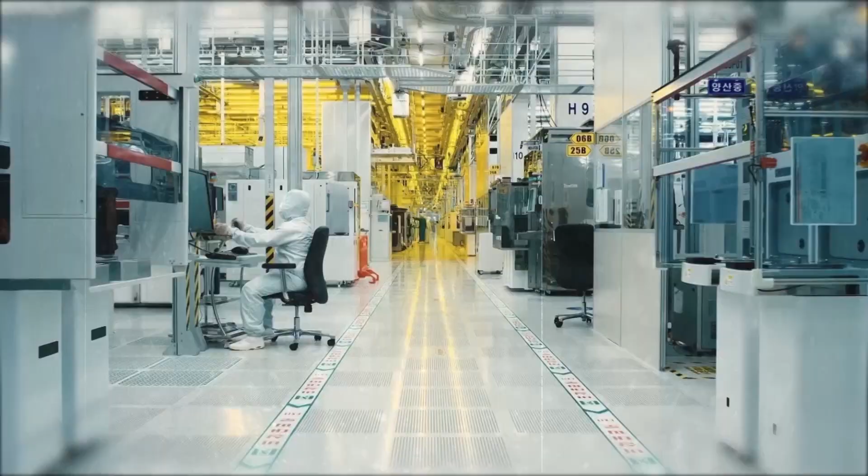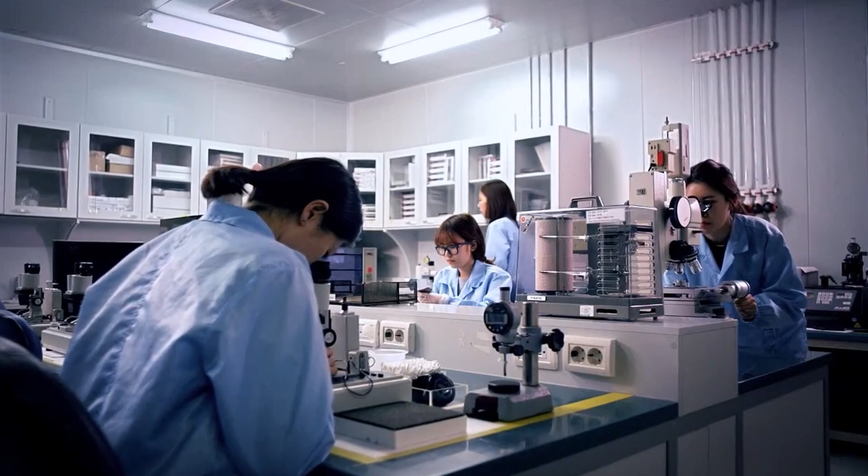Amidst the world's rapidly accelerating changes and competition, what kind of future are you preparing for? We are charting a path to the future through science and technology exchanges, bolstered by international cooperation. In this era, where scientific and technological competitiveness is directly linked to a nation's diplomacy and security, the power to overcome such challenges lies in international cooperation that fosters synergy through collective efforts, and from talents who will shape the forthcoming era. The scholars of the world are gathering in Korea.

A platform that facilitates exchanges between Korean and international scholars, as well as between seasoned and emerging researchers, is taking shape. BrainLink X Lab Day, organized by the Korean Federation of Science and Technology Societies, aims to be a global hub of talent. By consistently enhancing and expanding the global talent network, we're laying the groundwork for a brighter future.

By inviting global scholars, X Lab Day provides an opportunity for young Korean researchers to glean insights from the vast knowledge and experience of both Korean and international scholars, as well as to engage in collaborative research.

In 2022, the inaugural X Lab Day saw a total of 14 meetings across various technical fields. Altogether, 449 individuals participated, comprising 70 from overseas and 379 from Korea, all aiming to build a stronger network in Korea and abroad.

This year, for our 2023 X Lab Day, we have the honor of having Shing-Tung Yau, professor at Tsinghua University and a Fields Medal winner; Philip Kim, a globally renowned professor at Harvard University known for his research in graphene; Yoon Sung Hwang, professor at Stanford University and Hoam Award winner; and Humboldt Research Award winner Zhigang Suo, professor at Harvard University, leading discourses in their respective fields.

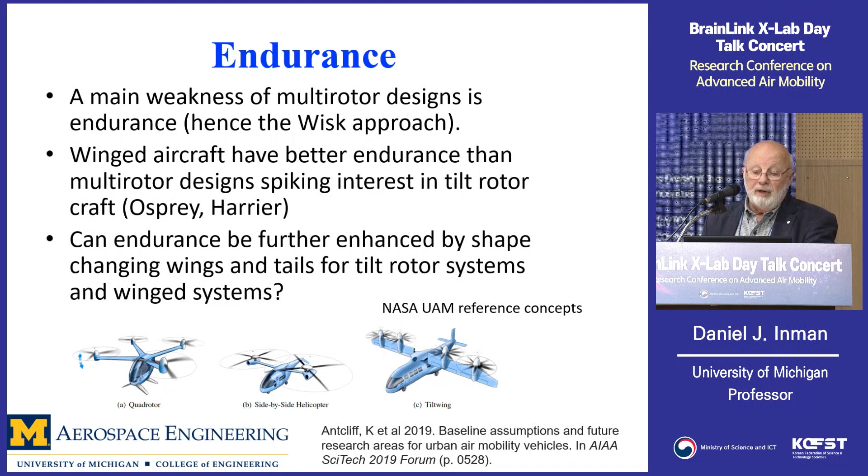Endurance is the main weakness of multi-rotor designs. Winged aircraft have better endurance, and multi-rotor designs have been spiking interest in tilt-rotor craft. You'll see some of that today. We'll go back in time to the Osprey and Harrier, which were early examples of VTOL behavior while also being able to have winged performance.

I've been greatly motivated in the last 10 years by looking at avian, or birds essentially, because of their capacity to change geometry, shape, aerodynamics, and inertia. For a long time it was felt their unusual shapes were due to aerodynamics, but it turns out what they're really doing is moving their inertia around so they can change between being very efficient or being very maneuverable. You can't have both, and we can see this in the design of commercial aircraft versus fighter aircraft.

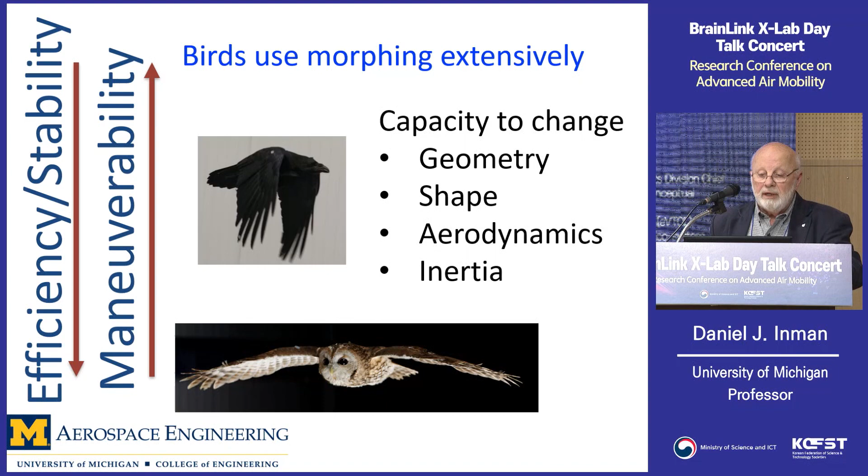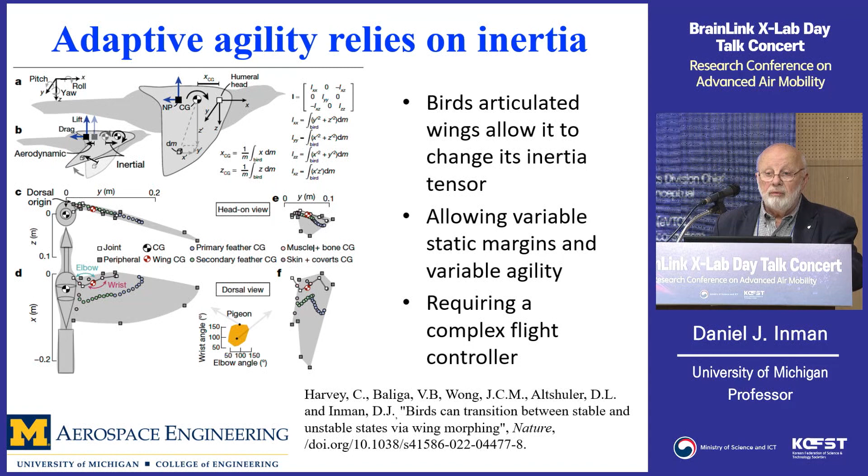So looking at that, we discovered that really what they were doing is shifting their inertia around, and that allowed them to change their static margins and have variable agility and variable stability. That in turn requires a complex flight controller, which drove us to looking at machine learning techniques to understand how to build complex controllers. Controlling inertia actually should not be a surprise.

We all watch the Olympics, and gymnasts do exactly this to have super agile or hyper agile behavior, by moving their inertia around. You can even do this as an old high school physics teacher, which is how I started out - you'd sit in a chair and move your arms back and forth and create interesting motions.

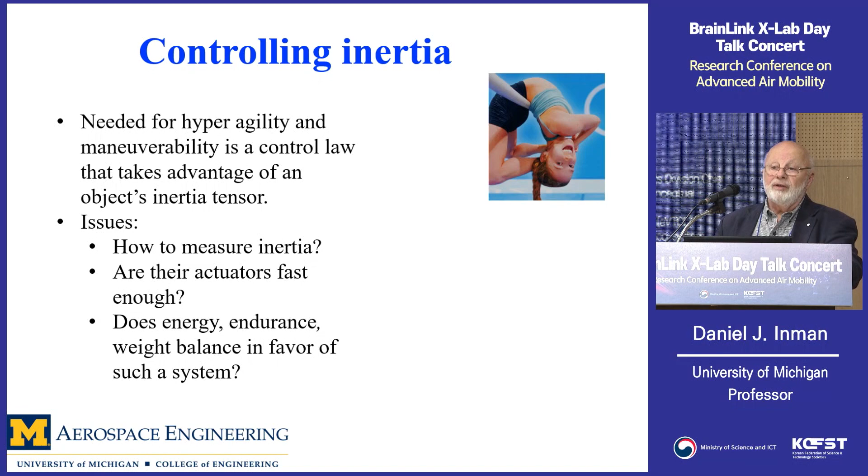So how to measure inertia is an issue. Are there actuators fast enough to take advantage of that? Does energy, endurance, and weight balance in favor of such a system? So there's lots of issues there. These are, as I said earlier, TRL-0 concepts, not things that have been done.

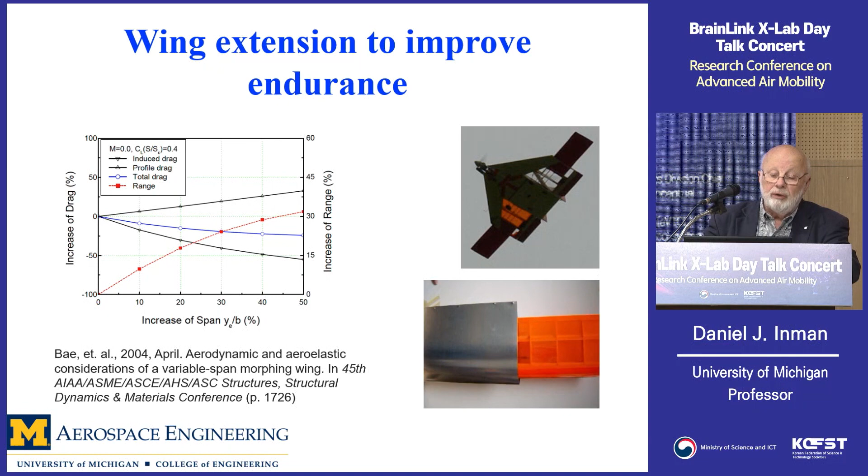Advantages of autonomy: reduce routine task and operator fatigue, and quick response to issues such as gust alleviation. Reinforcement learning needs to be balanced against safety and validation, with potential to solve gust issues, endurance issues, and stability issues. The other thing that happened is there's been quite an advancement in embedded computing chips, learning algorithms, and autonomy.

Starting out with microcontrollers and ending up now with memristors and other things, they're very small, very fast, and don't use a lot of energy or generate a lot of heat. So that's all good news for VTOL and eVTOL characteristics. Just an example, a memristor state inference for gust measurement, which we've successfully done, at least in the wind tunnel.

And then a summary for morphing: given multiple constraints, a vehicle designed for AAM must satisfy radical shape changing, or morphing may provide viable solutions to move forward - long endurance, high agility, help to satisfy weight and volume restrictions, and expand the use space. And for that, I'll rest my case. Thank you very much.

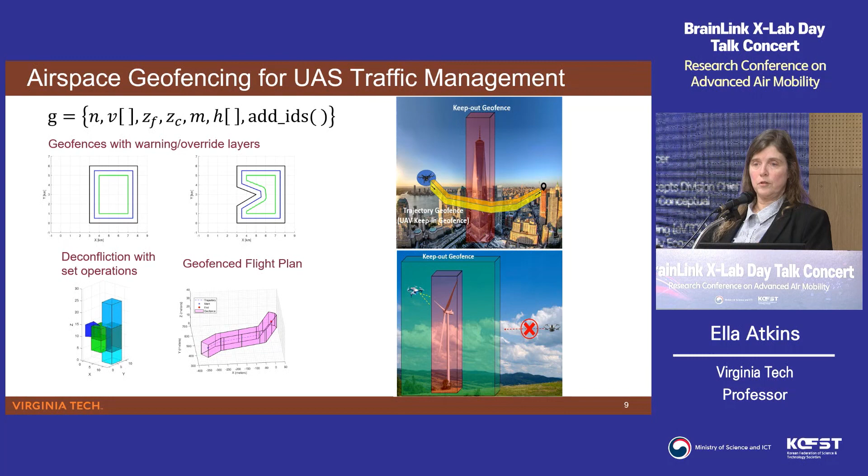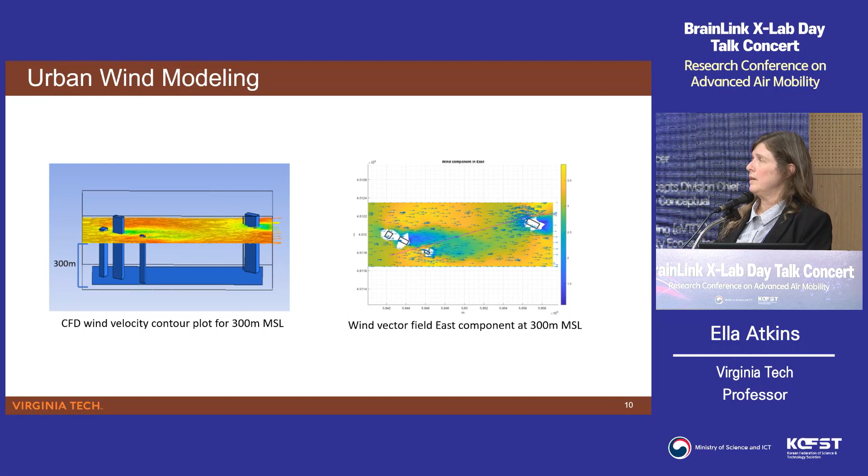As we look at geofences and small UAS flying, whether they're having an emergency or not—this isn't something my group does a lot of—we have to model the wind, because if we're flying low in an urban canyon, the wind has a huge impact. This example illustrates how much you can see with the different shadings in the diagram on the right. The wind, even a steady predominant wind, can vary as you go around buildings, and that has an impact on the geofences as well as the flight plans.

So the buildings here you see in green have the geofences around them. They're keep-out zones, meaning you can't go in and hit them. The flight trajectory, the flight plan that we ultimately calculate, takes into account where the vehicle is expected to blow in terms of wind and the error that it might see because of that wind, and the changes as it goes around buildings. The airspace around the vehicle is also surrounded by a polygon with fixed ceiling and floor to make sure that aircraft remains safely separated from the buildings and any other aircraft in the vicinity.

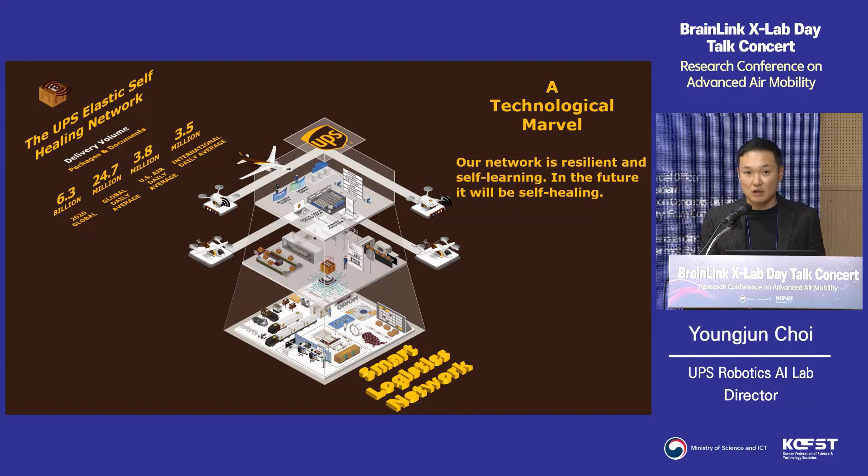So the foundation is smart logistics network. It is a combination of data and emerging technologies, including airlines and ground assets, like package cars and trailers. This network is very resilient and self-learning. It means that if something happens, it can automatically reconfigure the network so that we can continuously provide our best-in-class service to our customers. Let's deep dive about self-healing smart logistics network.

Simply, it is elastic, it is self-healing. It means that there are four main objectives. Our company is a customer-first company, it means that when we build our network, first we are thinking about our customers. We try to think about how we can improve our customer service. That's the first thing. And the second is how we can build an efficient network. And the third is how we can improve our revenue streams.

It means that if you see the recent announcement, UPS is trying to build logistics as a service. It means that we want to use data and new visibilities so that we can provide new visibility service. Last but not least, sustainability. This is a very hot topic, right? Electrified assets are one of the core technologies we want to apply in our network. UPS is trying to build a green network by 2050.

So I'm gonna talk in detail about the smart logistics network. Before that, I want to highlight customer satisfaction. When we measure customer satisfaction, we use net promoter scores. When you use our package delivery service, they're gonna ask, do you recommend this service to your friends or families? That's the net promoter score. Using this net promoter score, we are measuring our customer needs, and from that, we try to build our network.

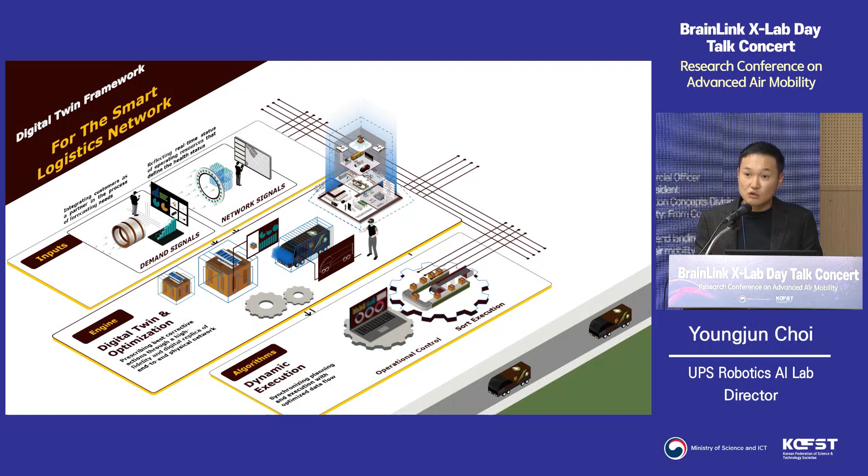Our UPS is continuously building this now. And here we need to think about advanced air mobility, because from our logistics perspective, we are heading toward digital twins. I know there are technologies trying to build eVTOLs, but from a business perspective, that's not enough. We need to minimize the gaps between the UPS digital twin teams and the eVTOL technology we are building.

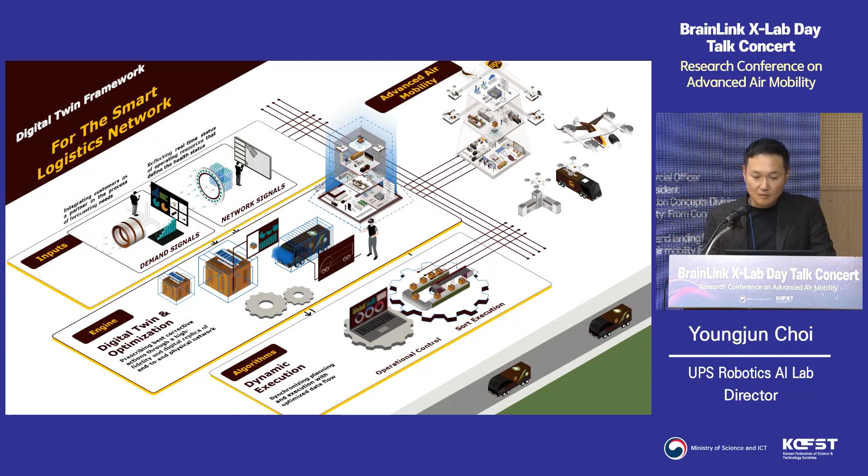So here I put three different videos. There are several activities UPS has done. The first one is using drones - we did a medical equipment delivery service working with WakeMed, which is campus delivery.

The second example is UPS trying a very innovative concept - combining a package car plus drones. We launch the drones from the package cars so that we can improve last mile efficiency.

The last video is about how we are closely working with Beta Technologies, because the Beta Technologies platform can be a great platform - we can move volumes between the hubs.

Now I'm going to switch the topic to eVTOL conceptual design. I just talked about the complexity of the operational concept, and there are a lot of things we need to consider, like constraints and different eVTOL concepts.

Here I'm going to talk about one of our research projects when I was a research faculty at Georgia Tech Aerospace. It's about how we can do better conceptual design in the early design phase. When we design eVTOL-like drone systems, we need to think about many different aspects: vehicle constraints, recharging mechanisms, different concepts of operations, and regulations.

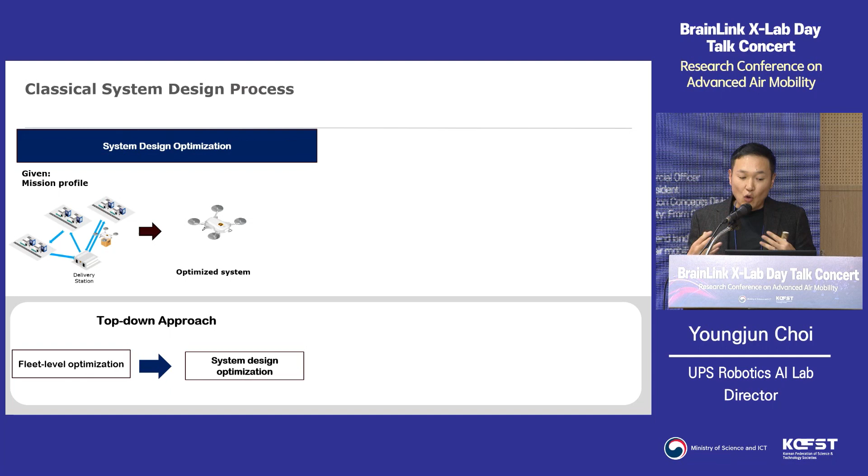Let's look at the fleet perspective. Operators typically have a notional concept of the vehicles, and based on this concept, we have a set of constraints and cost functions, and we try to optimize all those routes. This process is decoupled right now. So here we try to come up with an iterative concept so that we can combine everything together and have a better optimization result.

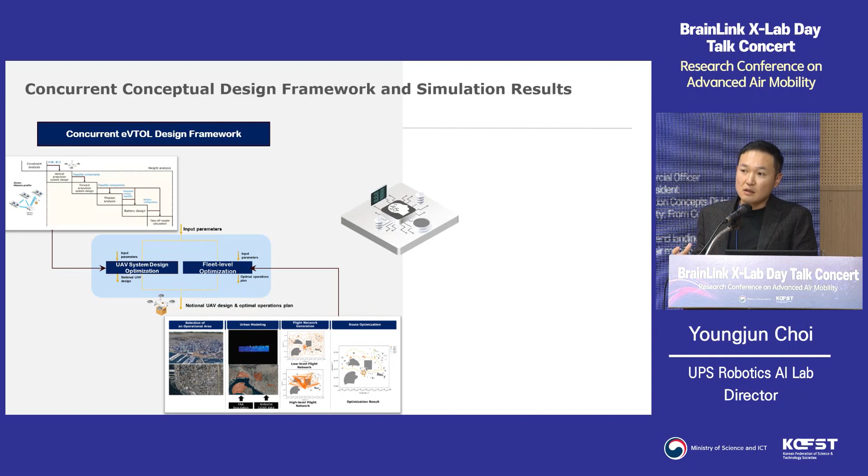So as you can see on the left side, this is a concept. Instead of decoupled optimization schemes, we try to combine two optimization structures. One is optimizing the sizing and synthesis, and the other is optimizing the fleet route. There are a lot of things going on, so today I just want to highlight key stuff.

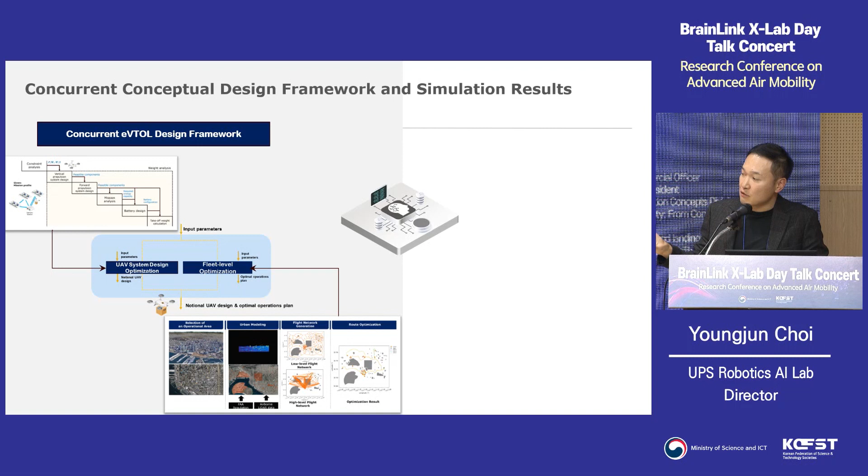Here, basically we use the airborne LiDAR sensor data and FAA regulations, and with AI and machine learning algorithms, try to come up with flyable routes, and then based on a set of constraints, we optimize the fleet route.

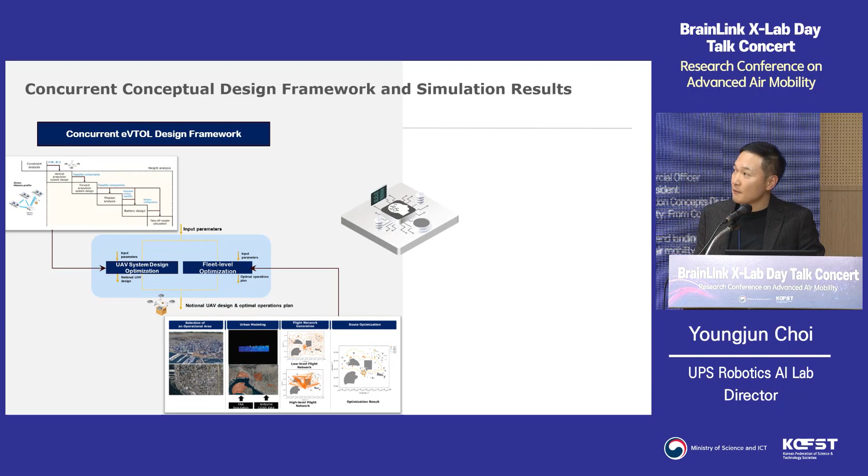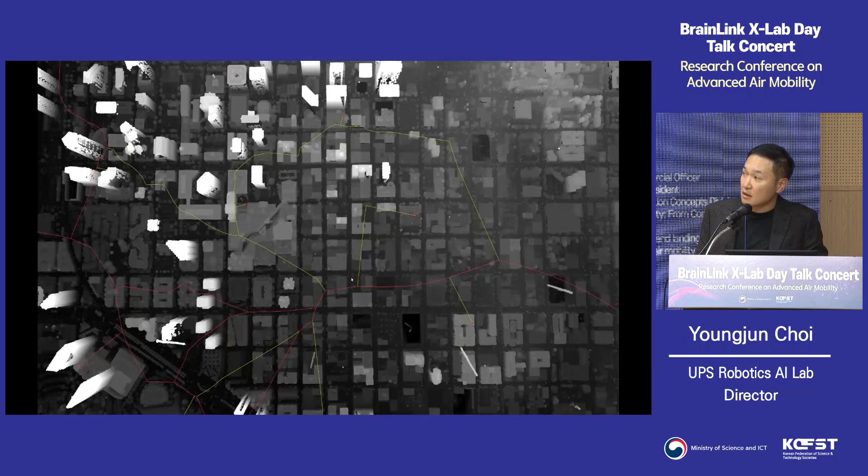So here I want to share one of the route optimization results. This is the San Diego area. We use the airborne lidar sensor data, which has multi-million point cloud information. As you can see here, there are lines about the delivery routes based on the demand data and also FAA regulation information.

As you can see here, our route optimization framework can provide collision-free delivery routes for the drones. And if you look at the total vehicle weight and cost, it's better because now we can combine everything together and see all those coupled impacts.

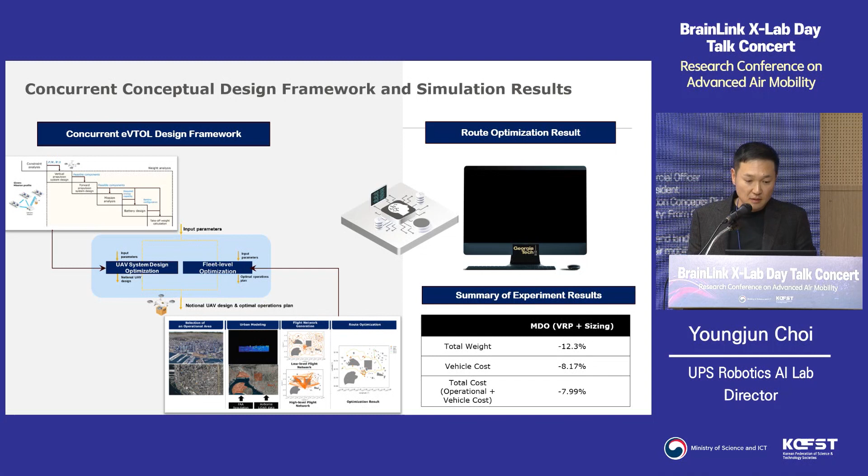So this is my last slide. UPS, we are a very innovative company. We are seeking the digital twin network. One important thing is how we can minimize the gaps between the digital twin network and the current advanced air mobility platform we are building here. And second, I introduced a novel MDO framework combined with the sizing and synthesis, plus the fleet optimization structure. Thank you.

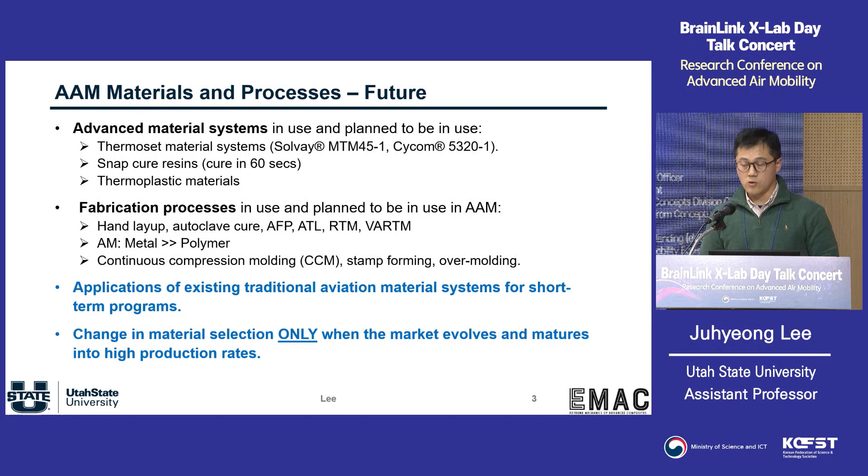Because it's a very high risk, and they don't want to simply change the material system to increase their mass production. So change in the material selection will be made only when the market size and volume are very, very large enough. That's one limitation when you do composite-related research at academia.

But basically, all the aerospace material systems are expensive compared to the automobile sections and the civil infrastructure. So it's very expensive, but high quality, and the manufacturing processes are somewhat lengthy and take a long time. So aerospace materials are also required to meet safety requirements.

So when you make a UAM, a PAV, you need to think about the safety of your passengers. We can't simply use random material, as that will cause a lot of legal issues. And also, the aerospace materials are required to be selected from a certified database.

So we have a restriction. We have to choose this material system from the database that includes all the certified material. So if you think about the near future application using the same or existing material system, how can we optimize or maximize structure performance and increase the payload while still minimizing the weight, cost, and leading time.

That was my kind of motivation for the research. And after a month of thinking, I thought about whether we can use a traditional folding and cutting technique to make a structural component.

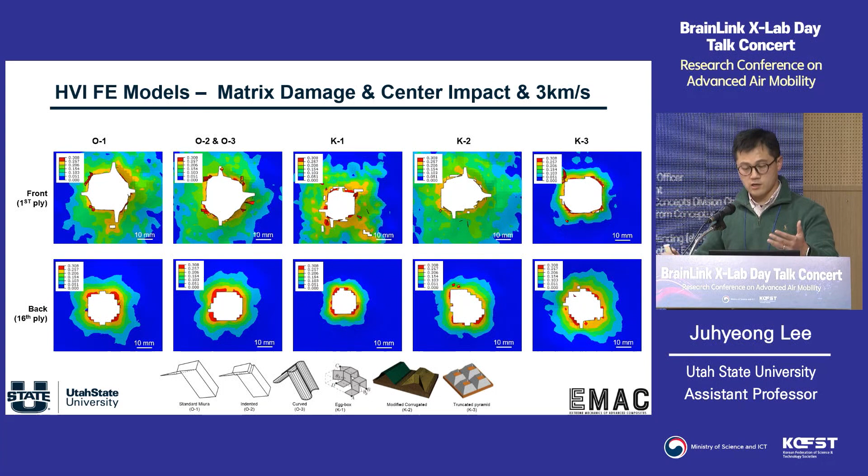This one shows matrix damage in volume-wise terms. You can see the impact side damage, the through-thickness damage, and the back side damage. Again, you see huge variation in the damage and failure of the fold core sandwich panel.

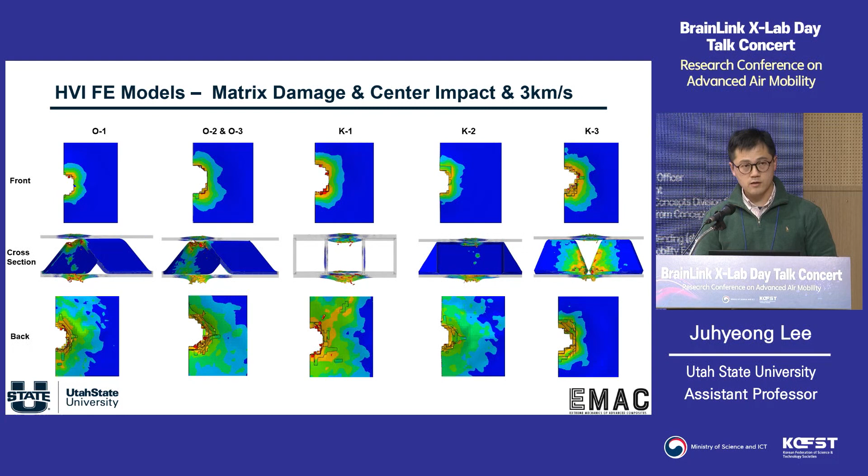If you think about the severity of the damage, delamination is really the worst, followed by matrix damage and then fiber damage.

As a concluding remark: we wanted to evaluate the dynamic performance of the fold core sandwich panel, and both testing results and numerical prediction showed these are highly influenced by the core geometry. Both origami and kirigami cores can be used, and they offer comparable hypervelocity impact resistance. However, if you think about manufacturability, origami is much easier to make. You can make a very beautiful kirigami core-based structure, but that may be much more expensive.

So thinking about the mass production of your volume market, my recommendation for the new structural core will be origami-based. One benefit is the fold core sandwich composite can be designed to add additional functionality through core topology optimization. That means you change the shape and material system, and appropriate core material selection will maximize structure performance while minimizing the total weight of aero vehicles. I expect our fold core sandwich composite can be used for any commercial aviation industry sector, including jaunt. Thank you.